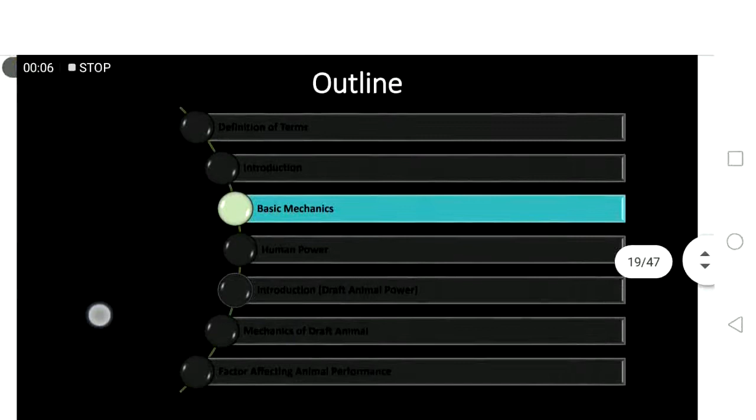So after the basic mechanics on the human and animal power, let us now proceed to the basic concept regarding human power. We all know that before the advent of our machineries, human power was used in many agricultural operations such as planting, seeding, and harvesting. At present, in some areas where labor is sufficient and mechanization is not fully emphasized, human power can relatively perform the job.

As you can see in the picture at figure 3, the human pump used human power to pump and get water from the well. That is the common way of pumping water during those times, according to Campbell 1990.

While on the right side, figure 4 shows that human power was also utilized during the transportation of water. There are two buckets hung on a piece of rod carried by the human on his shoulder.

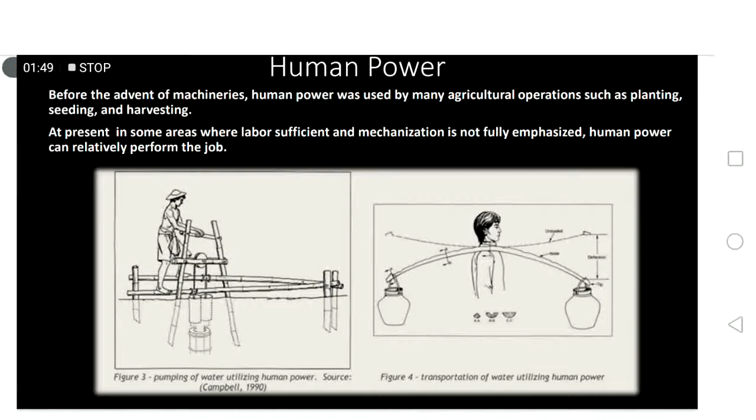There are many agricultural operations, especially here in our country, where we usually utilize human power. During planting, as you can see, for example in planting rice, diba? The 'magtanim ay di biro,' wherein they use human labor to plant rice seedlings one by one on the field. Also for harvesting, they use human power, for example for picking ripe mangoes, picking ripe tomatoes, or for livestock, picking chicken eggs, and many other agricultural operations.

So even before and even today, we usually tend to utilize human power, especially for labor that requires low power output, or a job that can be done by low power output.

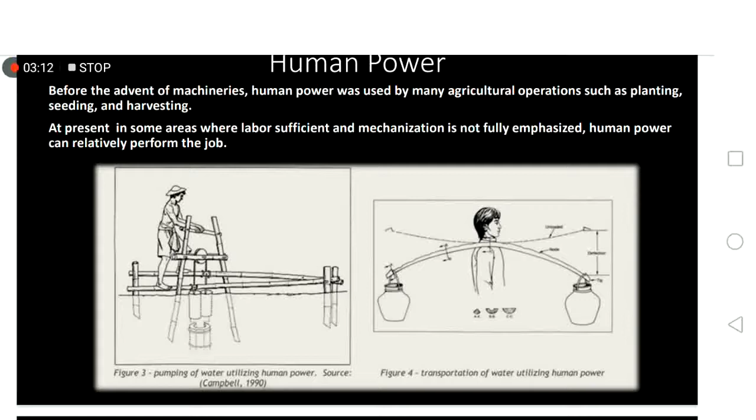Humans generally generate their power or energy by eating food. We usually take food in order to have energy, so that we can utilize that energy to perform a specific task, or to have the available power or capability to perform a certain job.

The chemical energy from the food that we eat is converted to energy, and some of it is used for doing work, while the remaining energy is expended on bodily functions such as metabolism and others. So not all the energy converted from the food we eat can be used for useful work; some of it is used by our body for different functions.

According to Campbell, man develops a total power of 0.5 HP from the food he eats. However, only 0.1 HP is available for useful work. So the total power that man develops is 0.5 HP, but only 0.1 HP is available for useful work. This data is based on a 35-year-old European laborer working 8 hours a day and 48 hours per week.

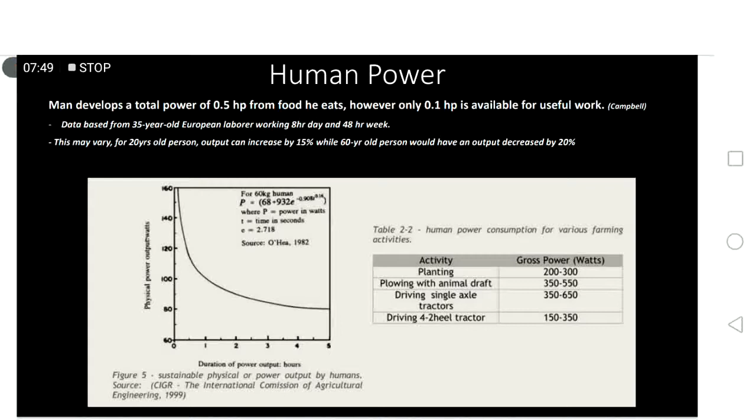Also, heavy activities would make humans get tired right away due to exerting a greater amount of energy, leading to shorter productivity time. So when we have heavy or drudgery jobs, humans get tired easily, so the productivity time is expected to be shortened. While lighter activities can be sustained for a longer time since they require only a lesser amount of energy. Hence, the available useful work can be said to be around 5 to 20%.

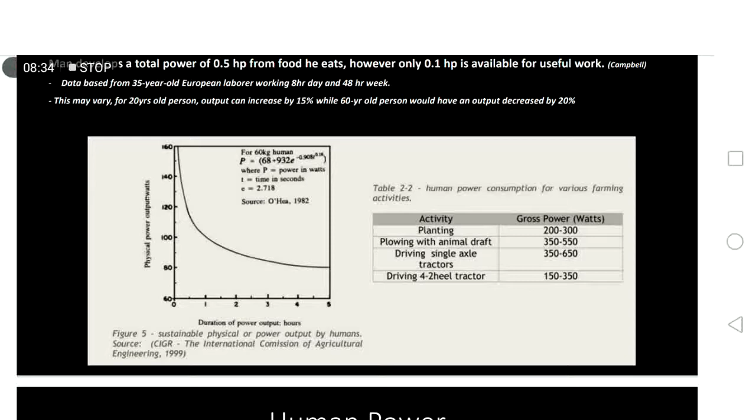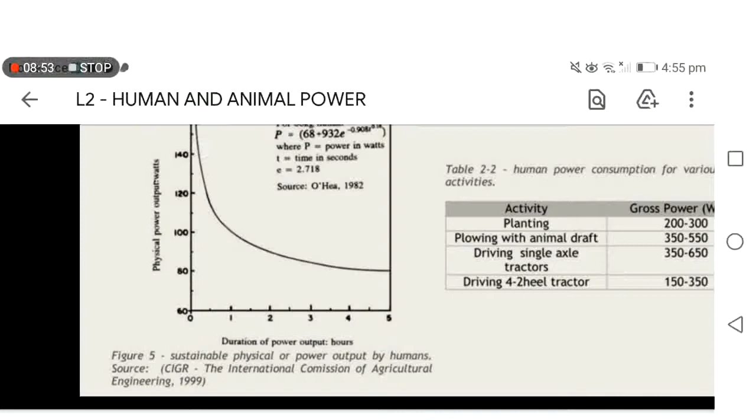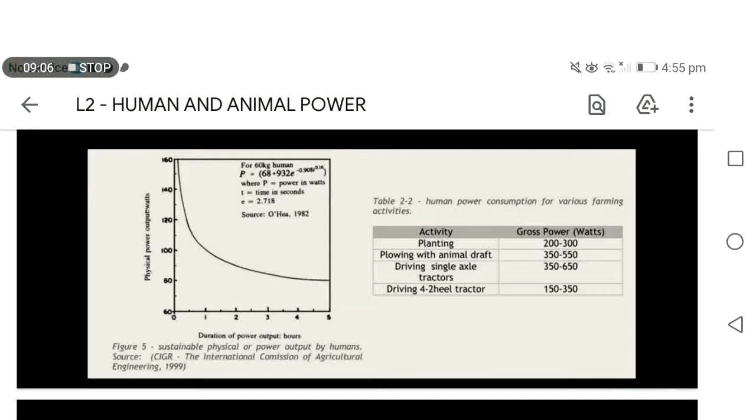In figure 5, we can see the relationship between the duration of activities and human power output, showing physical output activities and duration of power output. If you increase the heaviness of the physical activities done by the human, you might expect a shorter period of power output, whereas if you lighten the physical activities, the human can work for a longer period of time. That is the graph between duration in hours of power output and physical power output activities in watts.

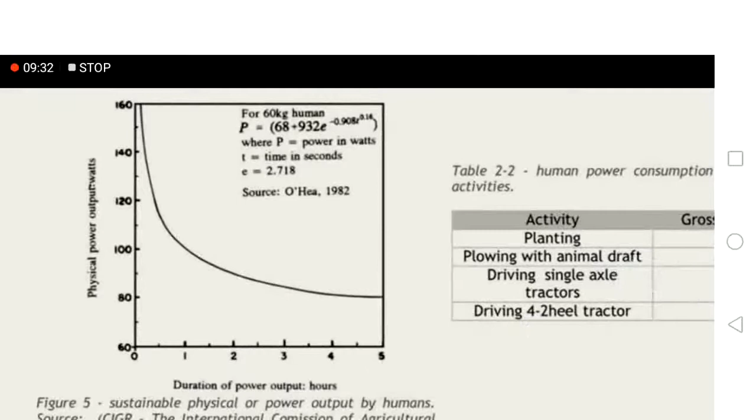In table 2, we have a list of gross power consumption for various farming activities. The unit for power is usually watts or horsepower, but here for human power they use watts. For planting, the human power consumption is about 200 to 300 watts, while for plowing with animal draft, it's 350 to 550 watts.

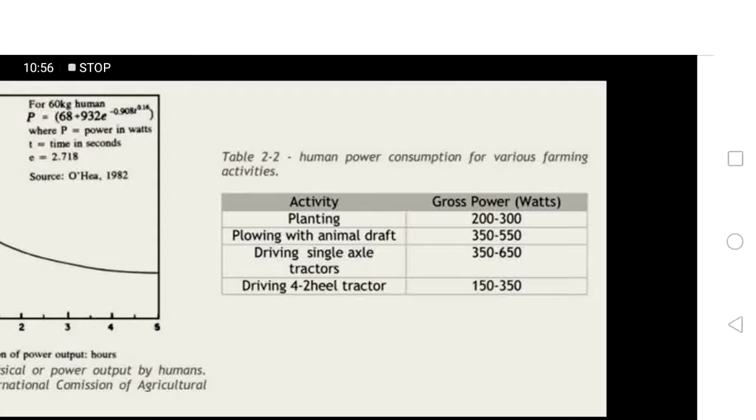So, which is heavier in terms of agricultural activity, plowing or planting? Based on the power required, we tend to need more power during plowing than during planting. For driving a single axle tractor, we need 350 to 650 watts, while for driving a four-wheel or two-wheel tractor, we need 150 to 350 watts.

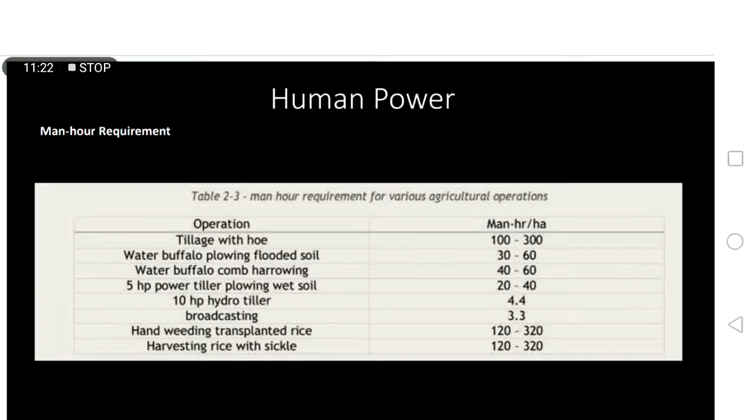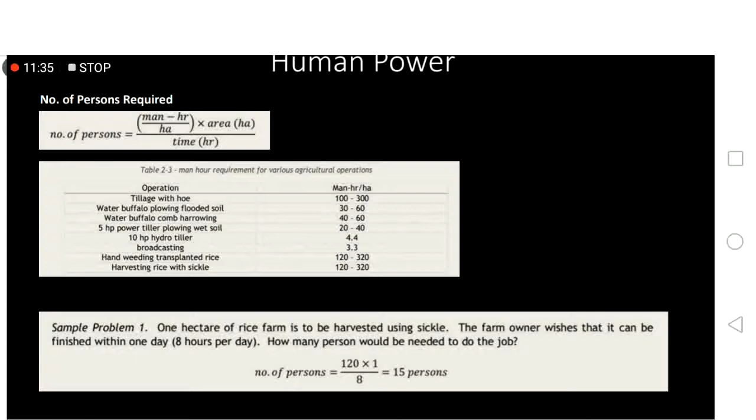On the next video, we will discuss the continuation of human power, specifically the man-hour requirement, and we will also compute the number of persons required to do a specific job. So see you in our next video.